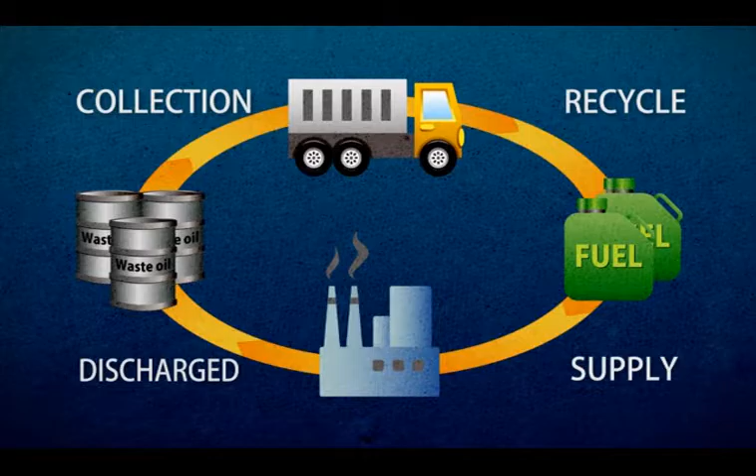Under these circumstances, Tadaki Tanaka, an Osaka Bay fisherman, established Kinki Environmental Industry Company Limited, the predecessor of REMATEC, in 1974. After engaging in collecting and transporting waste, he built a system to collect waste oil discharged from factories and recycle it into fuel. He took the lead in promoting a recycling-oriented society.

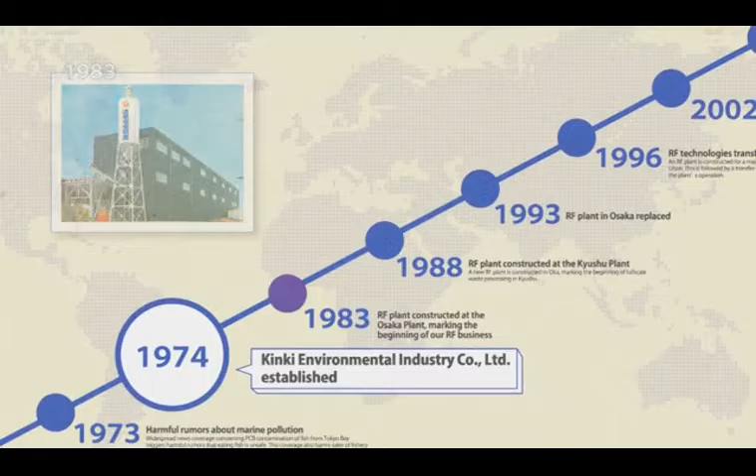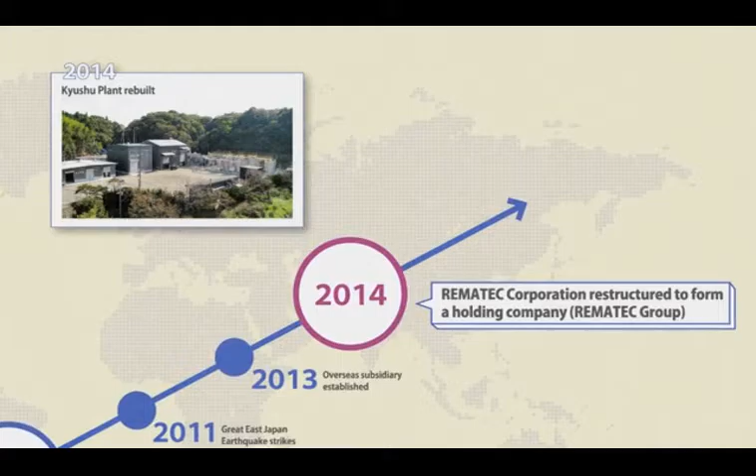Since then, while responding to the changes of the times and the characteristics of local communities, REMATEC has worked to solve numerous environmental problems with innovative ideas and steady efforts. In April 2014, 40 years after the foundation of Kinki Environmental Industry Company Limited, we shifted to a holding company system and took a new step forward as the REMATEC Group.

Our goal is to contribute to the establishment of a sustainable society by utilizing REMATEC Group's technology to recycle various materials. Based on this guiding management philosophy, with both the Japanese and global markets in mind, we use our group's power to continue contributing to protecting the global environment.

We will introduce our RF business, a resource recycling system using an industrial waste recycling plant.

As of April 2014, the remaining capacity of industrial waste final disposal sites in Japan was approximately 183 million cubic meters. Estimates by the Ministry of the Environment indicate that these sites will become full in about 14 years. Thus, the waste disposal environment continues to face difficulties.

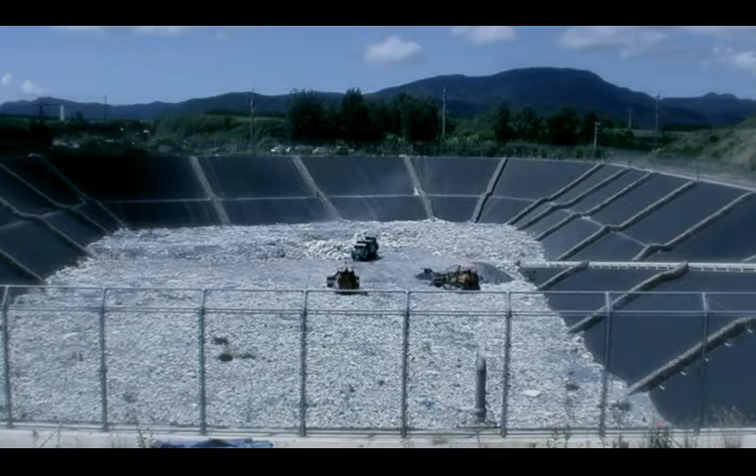Under these circumstances, in addition to reducing waste disposal costs as part of its efforts to increase profitability, industry is urged to fulfill many responsibilities as an emitter of waste. To solve this problem in industry and society as a whole, as exemplified by the 3 R's—reduce, reuse, and recycle—we need to adopt waste disposal methods that better take the needs of the environment into consideration.

One of such methods is the REMATEC Group's RF manufacturing technology. RF stands for Reclaimed Fuel, a coal fuel alternative. RF is a reversibly thixotropic auxiliary fuel composite for cement burning, using the patented mixing technology independently invented by the REMATEC Group. We call it reclaimed fuel—in other words, recycled fuel using industrial waste.

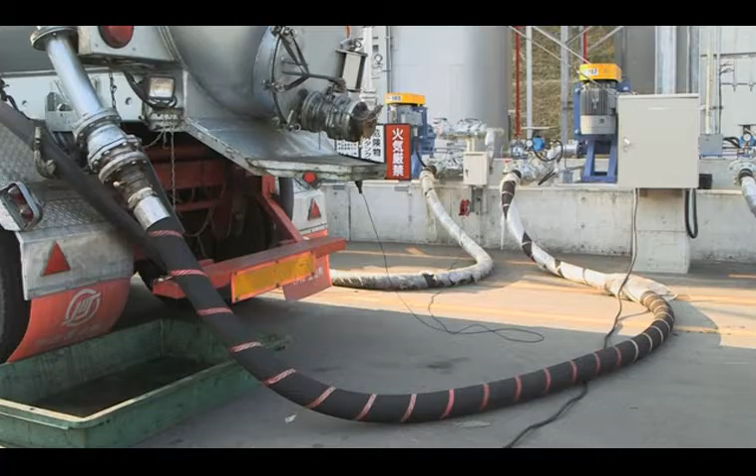The most important characteristic of RF is thixotropy. Thixotropy refers to a phenomenon whereby material viscosity falls when churned, or rises when left standing. For example, products such as mayonnaise and ketchup have such properties. Due to this property, RF excels in storage stability and can be safely transported, as its viscosity falls when pumped.

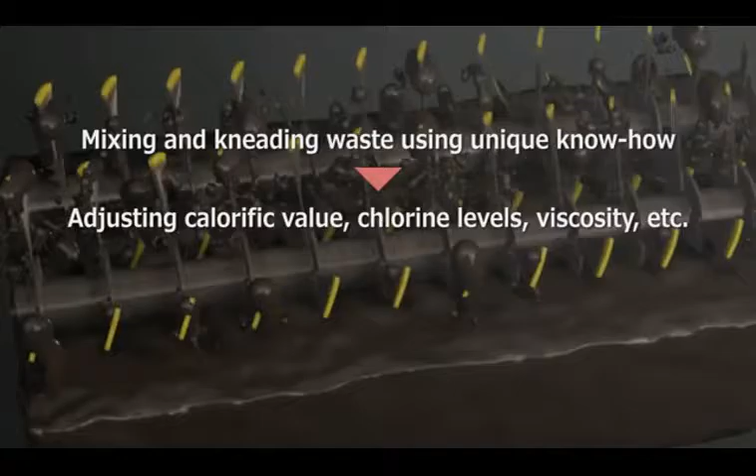Industrial waste recycling plants utilizing RF manufacturing technology can recycle a wide range of industrial waste, from liquids such as waste oil, waste acids, and waste alkali, to sludge and powdered materials such as cinder, discharged by various industries such as oil refiners, chemical manufacturers, ironworks, and paper mills. Using unique know-how, plants mix and knead various types of waste, adjusting calorific value, chlorine levels, viscosity, and so forth, then recycle the waste into auxiliary burning fuel for cement factories.

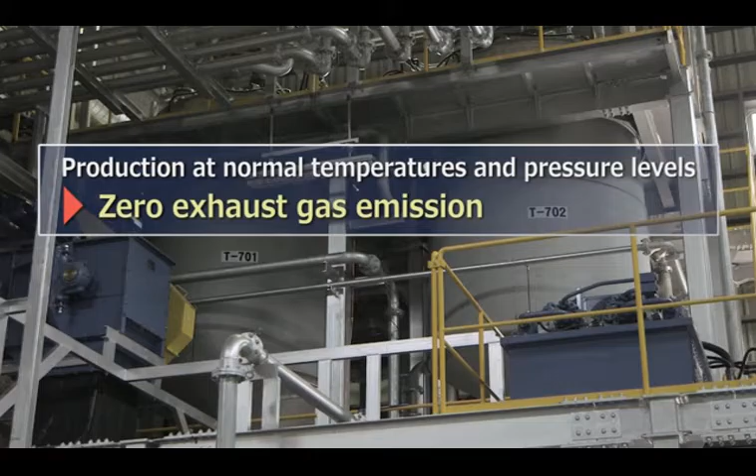In addition, the RF manufacturing process does not generate exhaust gas, as it is performed at normal temperature and pressure levels. The waste received is mixed using REMATEC's proprietary mixing technology, with nearly all of it recycled into RF. Thus, this manufacturing process generates no wastewater, a major cause of environmental pollution.

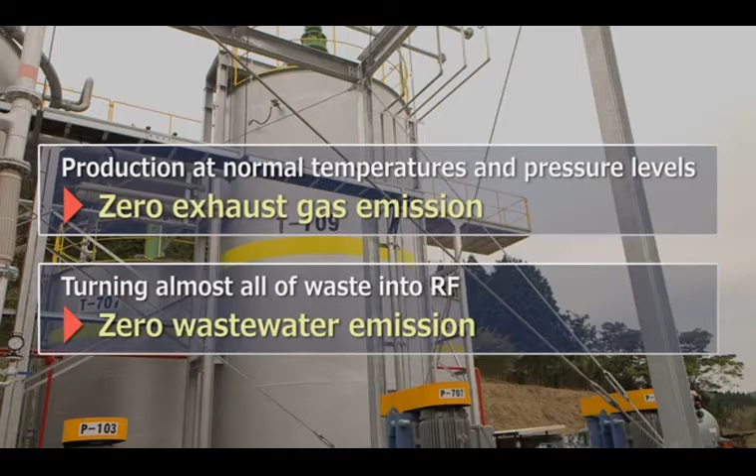Approximately 98% of waste put into the process is converted into RF, and all cinder generated at cement factories after combustion is used as raw material for cement, so no final disposal is needed. In short, RF production is an environmentally friendly recycling system with zero exhaust gas, zero wastewater, and zero landfill.

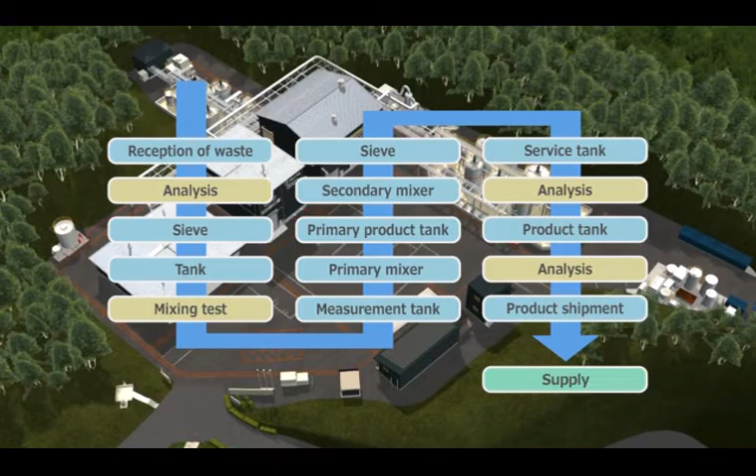The RF manufacturing process from reception to mixing to shipment is as shown here. It is important to grasp the properties and conditions of each type of waste. The know-how for matching various types of waste is also important. Now we will explain the RF manufacturing process in detail.

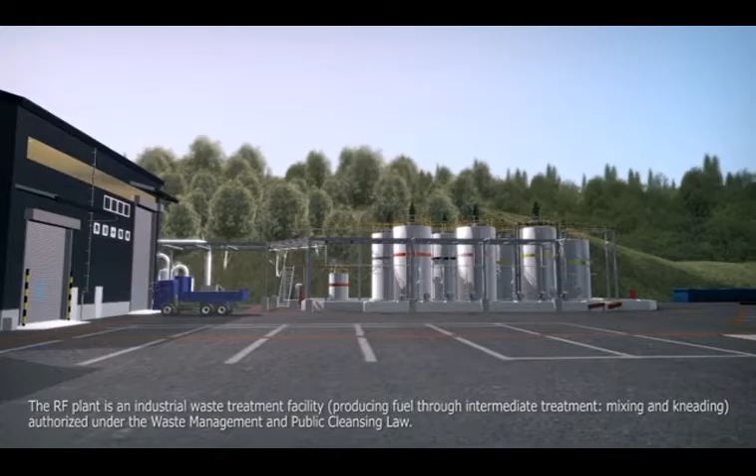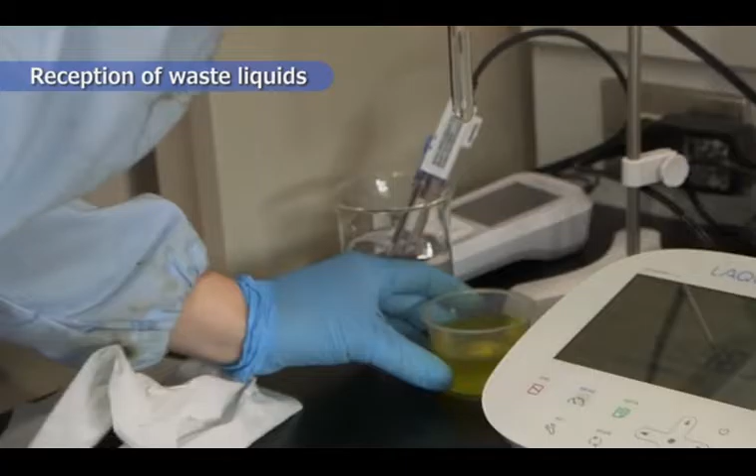The RF manufacturing plant receives waste using the optimal method for each type of waste. When received, all waste liquids are sampled to analyze their properties and conditions. After safety is confirmed through comparison with contracts and mixing tests, waste is put into different tanks for storage, depending on the contents and the type of waste.

Waste drums are also similarly sorted and stored after 100% inspections and mixing tests, and put into dissolvers for storage using drum tumblers.

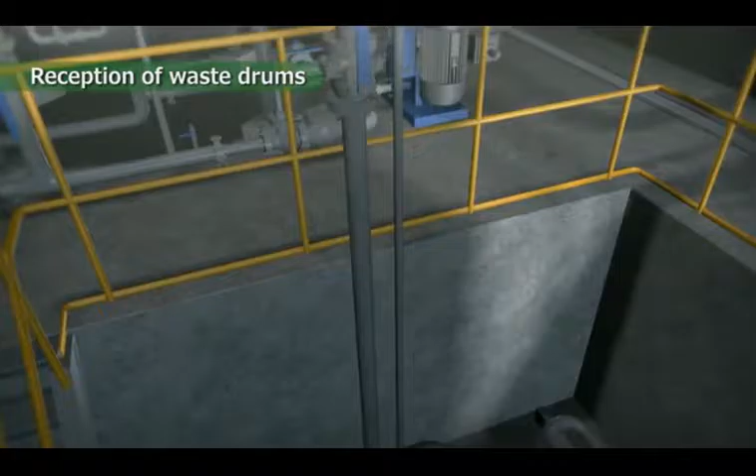Equipment dedicated to neutralization of strongly acidic or alkaline waste liquids are also installed. These liquids are neutralized in advance to reduce mixture risks.

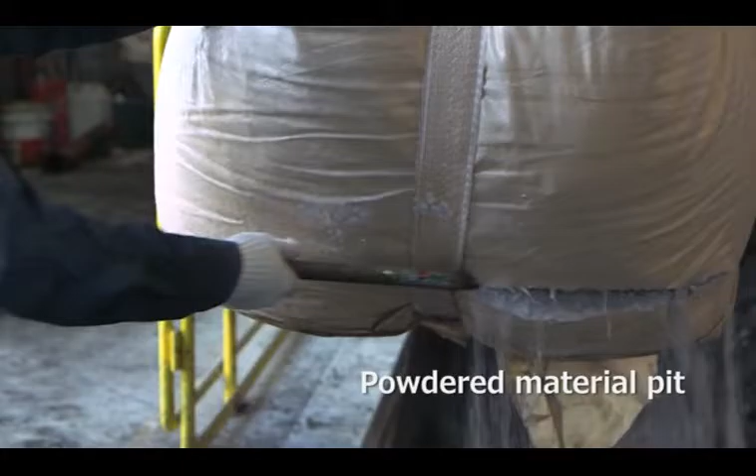Waste sludge is put into the sludge tank and powdered waste material into the powdered material pit. Both are analyzed and stored according to the type of waste.

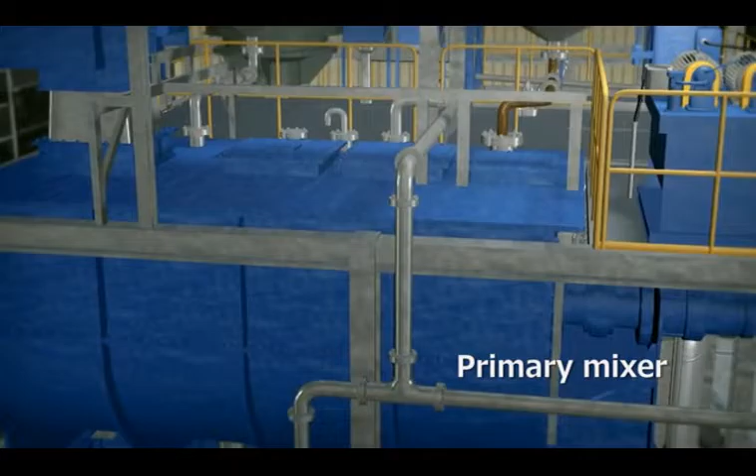Various types of waste are mixed according to the rate of combination determined in the control room. Waste liquids are sent to the primary mixer after weight is automatically measured in the measurement tank. Powdered waste material is put into the primary mixer using the crane and flight conveyor and mixed with waste liquids for churning.

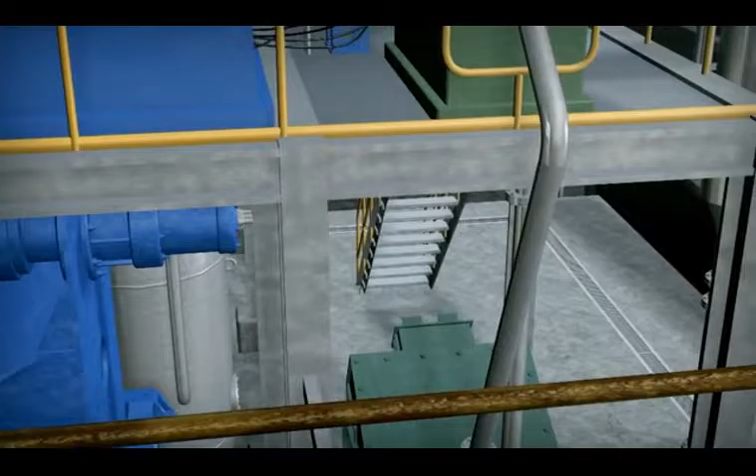Then the secondary mixer churns the mixed liquids at high speed and powdered material to crush solid matter. Through these processes, the waste becomes thixotropic and is converted into RF, recycled fuel.

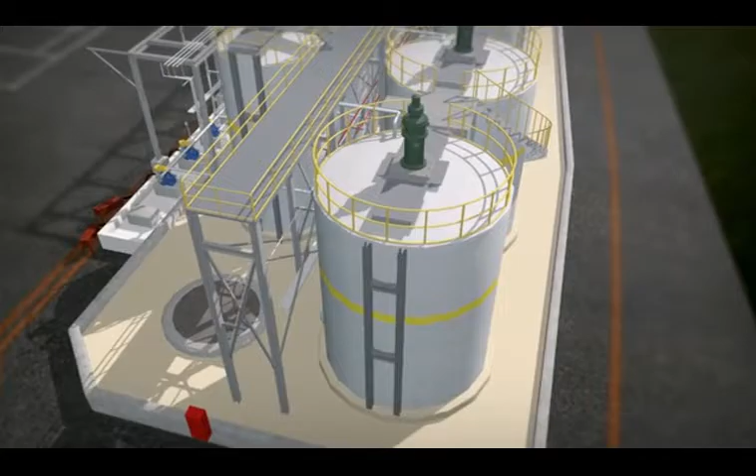Characteristically, RF is made easy to transport, store, and use through thixotropy. Specifically, while its viscosity rises when it is stored in the tank, preventing oil and water from separating, the viscosity falls when it is transported via pipe or during spray combustion, becoming liquefied.

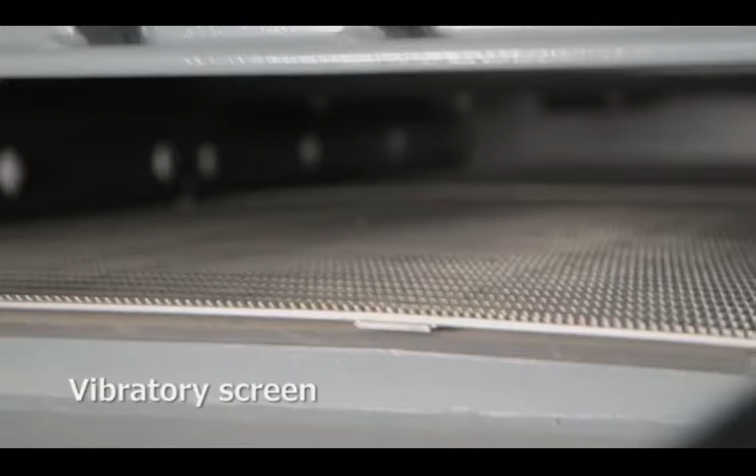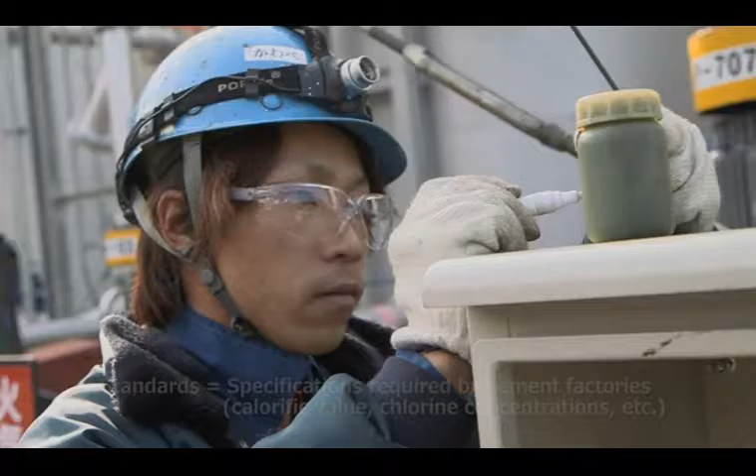Foreign substances are separated from the completed RF using a vibratory screen to enhance quality. In the last shipment process, products are analyzed for each shipment lot and only RF that meet company standards are shipped.

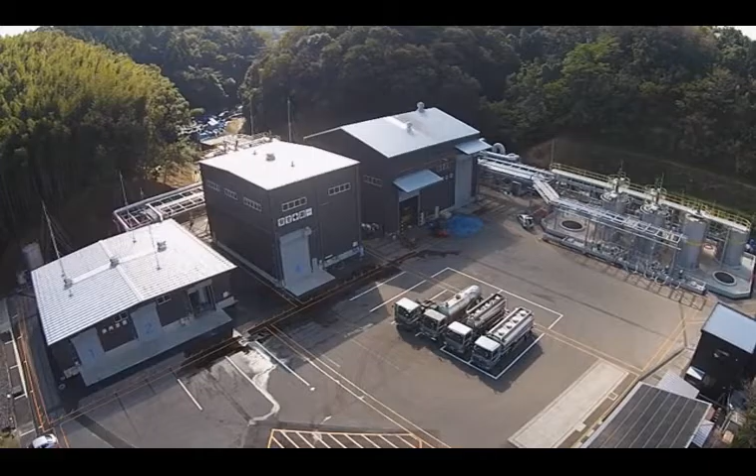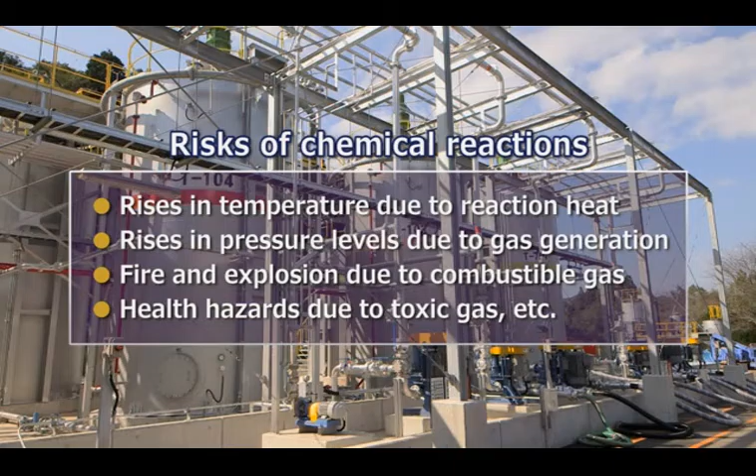To ensure safer operation, the RF manufacturing plant devises measures to reduce waste mixture risks causing adverse chemical reactions. The plant classifies the causes of chemical reactions and accidents attributed to them into 5 categories: those related to equipment, those related to material, those related to human skills, experience, and knowledge, those related to information such as documents and manuals, and those related to organizations such as management and administration. Then it analyzes the classified causes and devises the safety measures it should take.

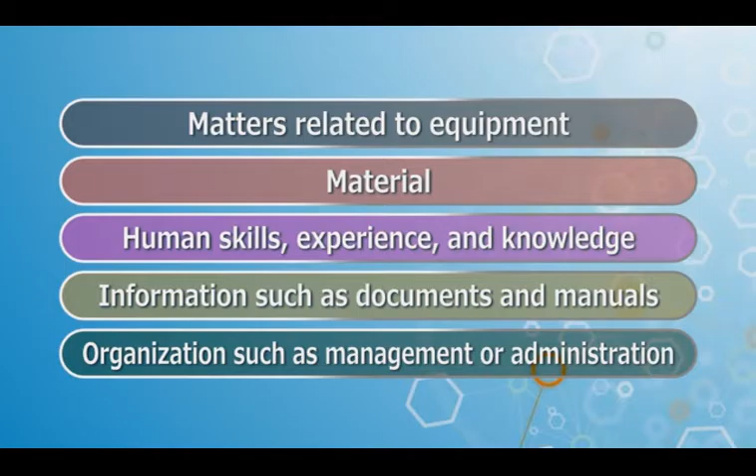Basically, when this plant was built, it was designed as a chemical plant meeting the guidelines for chemical plant safety assessments issued by the former Ministry of Labor.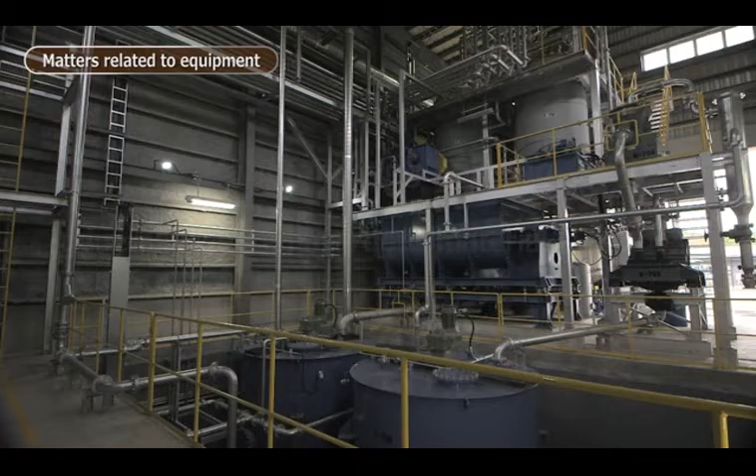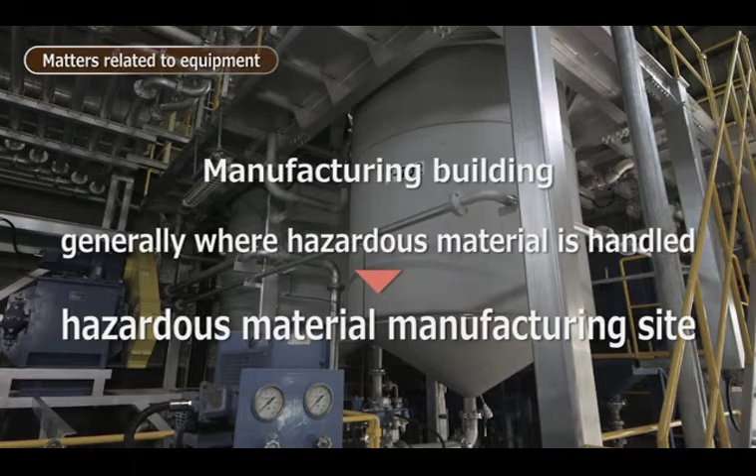RF does not fall into the category of hazardous materials as defined in the Fire Service Act, but in order to ensure its strict control, the plant has been authorized as a manufacturing site of hazardous materials. The factory is divided into 3 buildings with tank yards installed at 2 different outdoor locations.

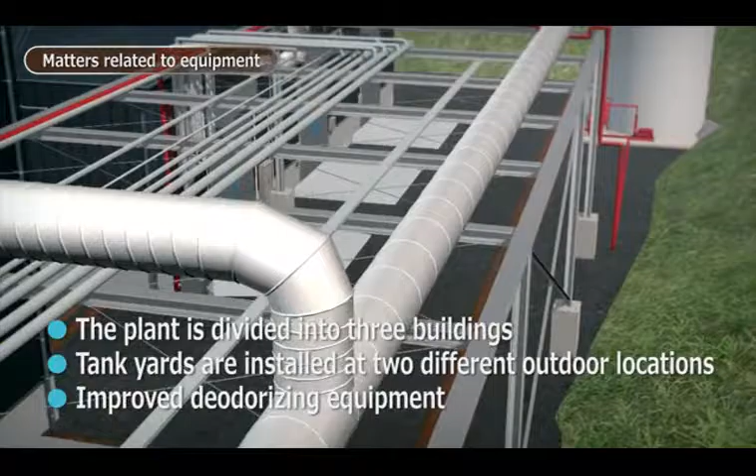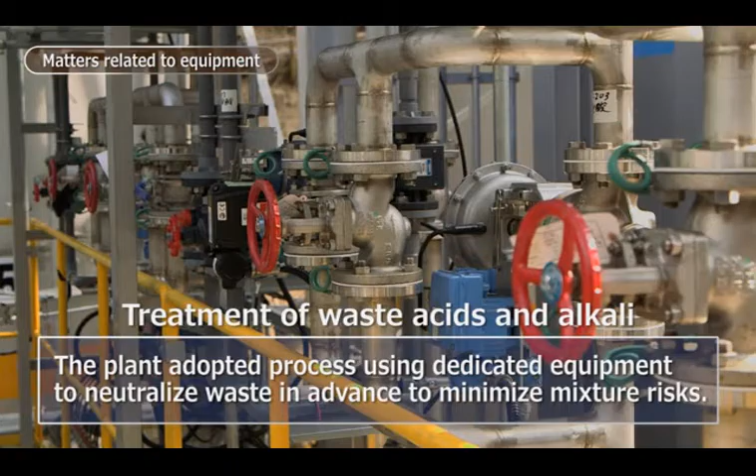In addition, as part of the deodorization measures, exhaust gas from the vent of the tanks is collected using deodorizing equipment. Waste acids and waste alkali are treated by neutralizing them in advance using dedicated equipment. Thus, pH levels are constantly controlled to minimize mixture risks.

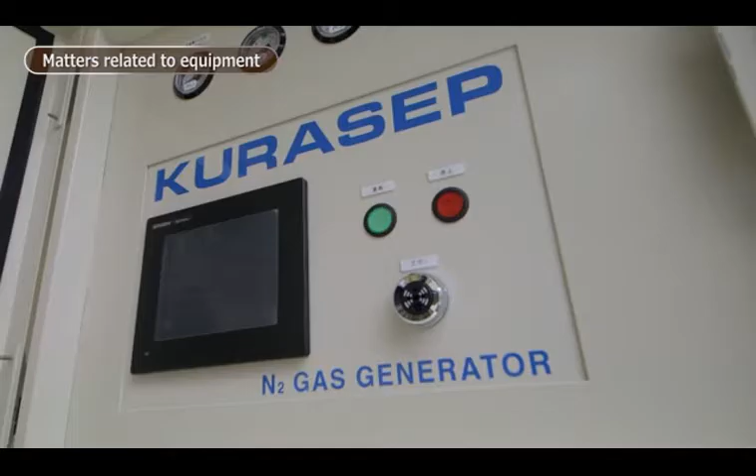Nitrogen generators are installed on the assumption that combustible gas remains in the waste oil and other storage tanks. The tanks are filled or emptied using breather valves, and empty space in tanks is always filled with nitrogen to prevent combustion or explosion.

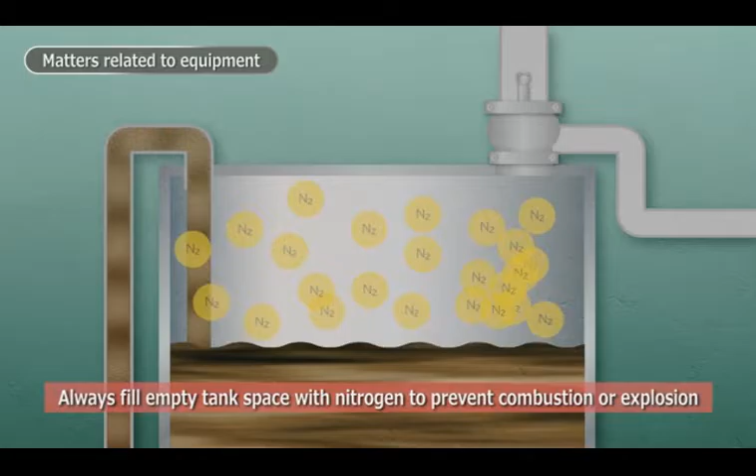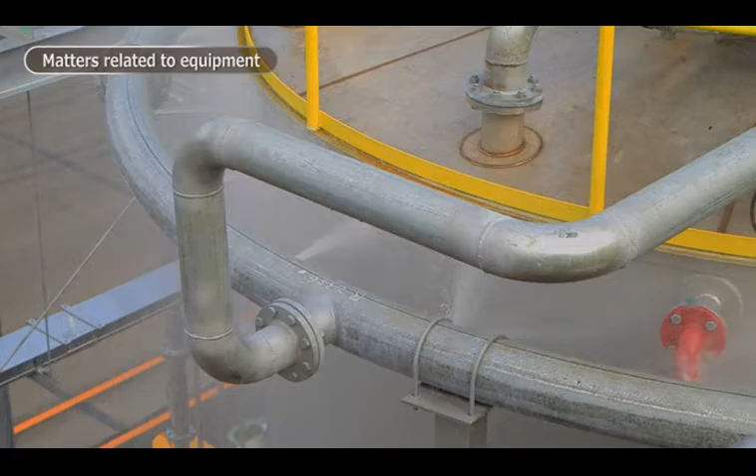In addition, the plant has equipment that sprays cold water if storage tank temperature rises rapidly due to factors such as heat from chemical reactions. In addition to spraying cold water on tanks, this equipment injects cold water directly into tanks as circumstances require.

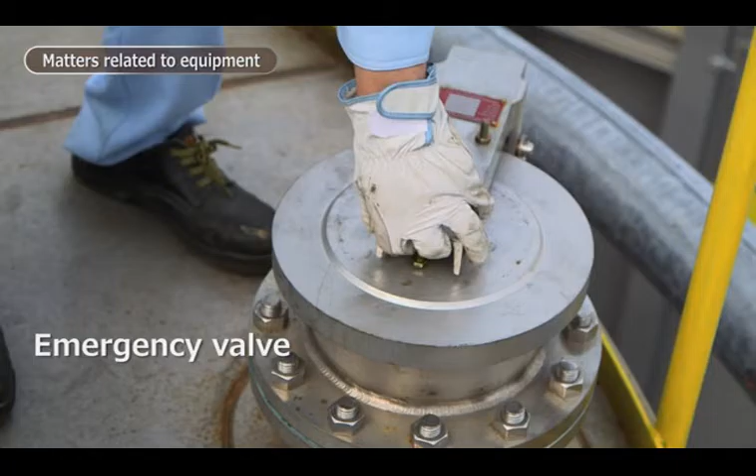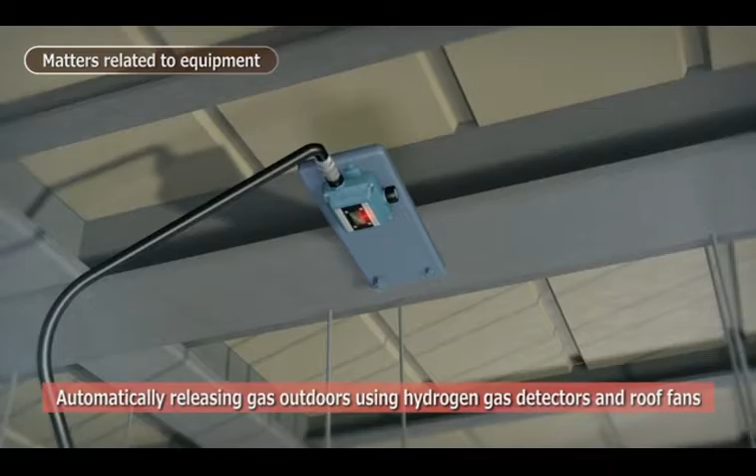Furthermore, there is a device that releases storage tank pressure. If the pressure level rises sharply, it automatically opens valves. And the plant is structured so that if chemical reactions produce hydrogen, gas detectors and roof fans installed on the ceiling of the building automatically release the gas outdoors.

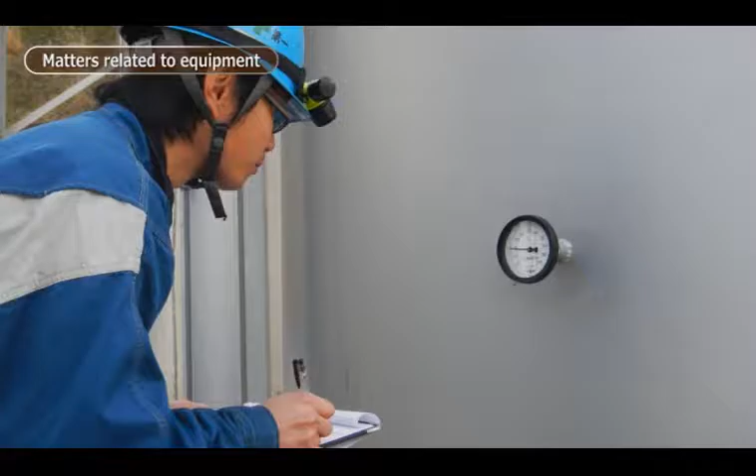In addition, a system has been put into place to automatically measure the temperature in each tank, detect changes taking place, and swiftly respond to those changes. The plant also makes hydrogen concentrations visible by establishing maximum permissible in-plant hydrogen concentration control levels and monitoring hydrogen concentration levels. If hydrogen concentration exceeds the control level, alarms for swift action sound in plant buildings.

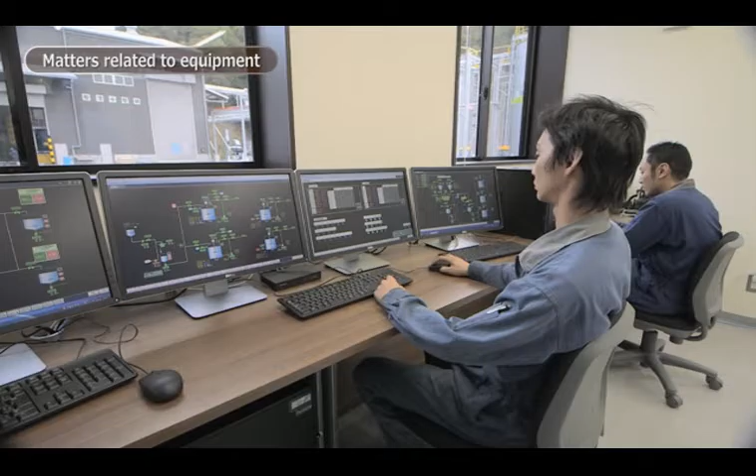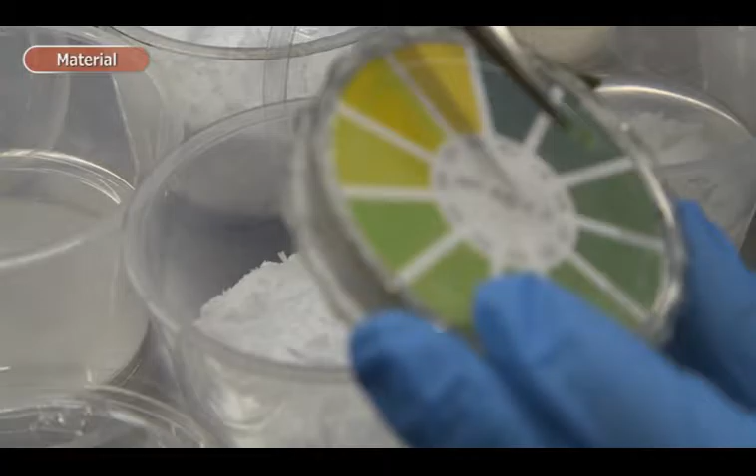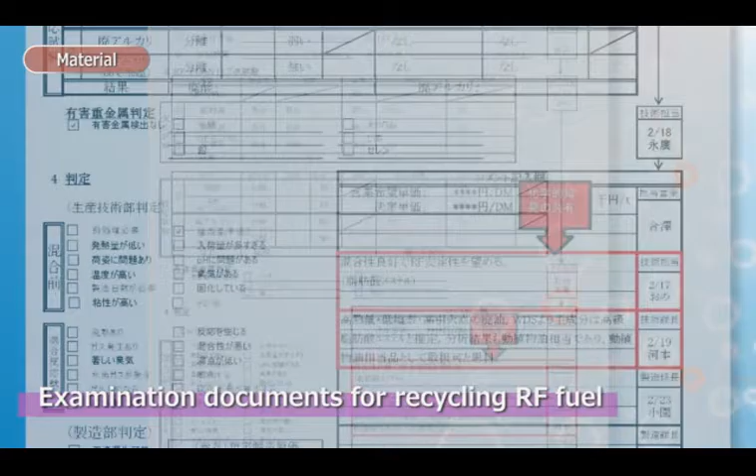As part of the measures to properly grasp the properties and conditions of waste, we have strengthened the inspection system for waste brought into the plant. To confirm the chemical properties of waste, we take samples and analyze them to determine whether they contain heavy metals or such. We make an all-out effort to confirm the safety of waste in advance by including risk details based on chemical knowledge in the sample examination documents.

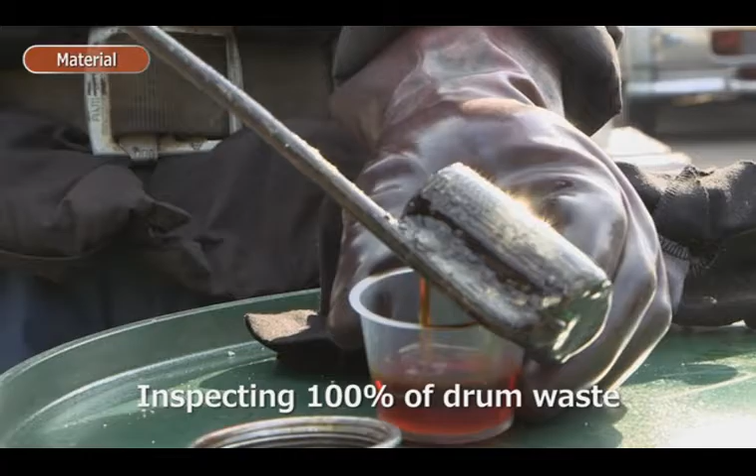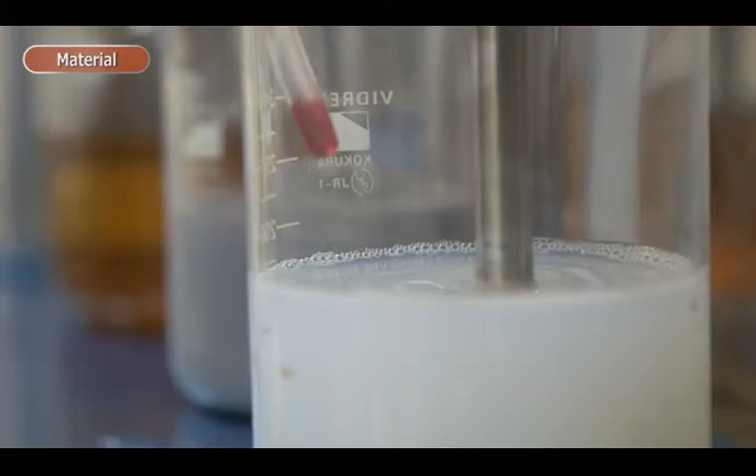We conduct 100% inspection of all waste materials contained in drums. When received, all waste is compared to the properties and conditions described in the contracts to confirm any differences. In the case of mixed waste, we conduct mixture tests using beakers to confirm the mixture composition or any chemical reactions.

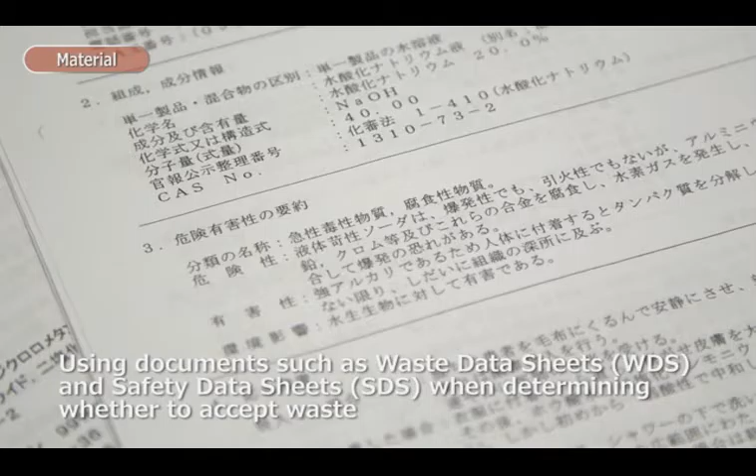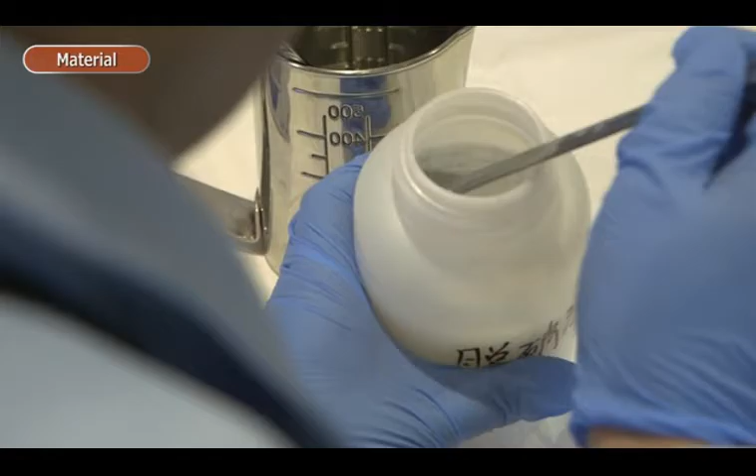We ask dischargers to provide detailed information on the waste they discharge using documents such as waste data sheets and safety data sheets. We use these sheets to determine in advance whether we should accept waste from dischargers. We also ask dischargers to provide information on changes in the waste generation process or the chemicals used, etc., periodically confirming that there are no changes from the waste properties and conditions described in the contracts.

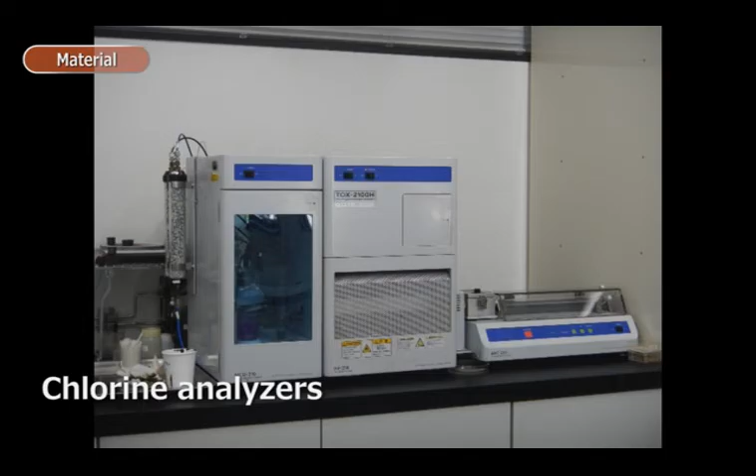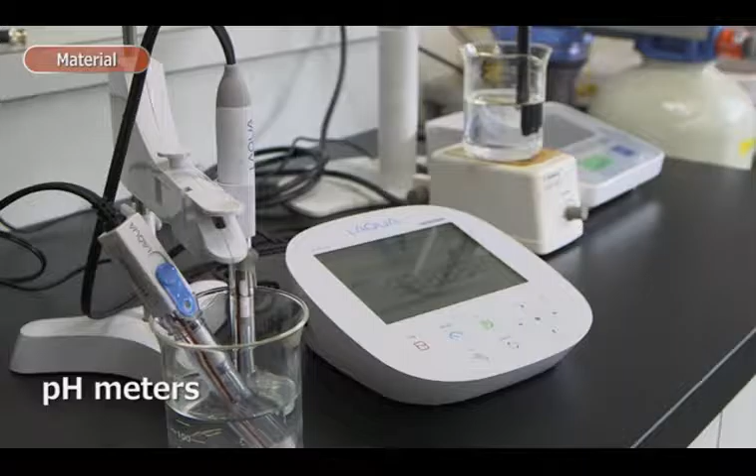Furthermore, we have created calorimeters, chlorine analyzers, fluorescence X-ray analyzers, flash testers, pH meters, and viscometers to establish a high-level analytical system.

As part of employee training, we hold meetings of all employees to examine operation flows in accordance with safety assessment guidelines. Other training programs include training aimed at improving knowledge of chemistry, tests for degree of understanding, and follow-up training based on test results. We also ask the Japan Industrial Safety and Health Association and other external organizations to send experts to training sessions mainly for managers and supervisors.

Lecture subjects include fires and explosions caused by chemical substances.

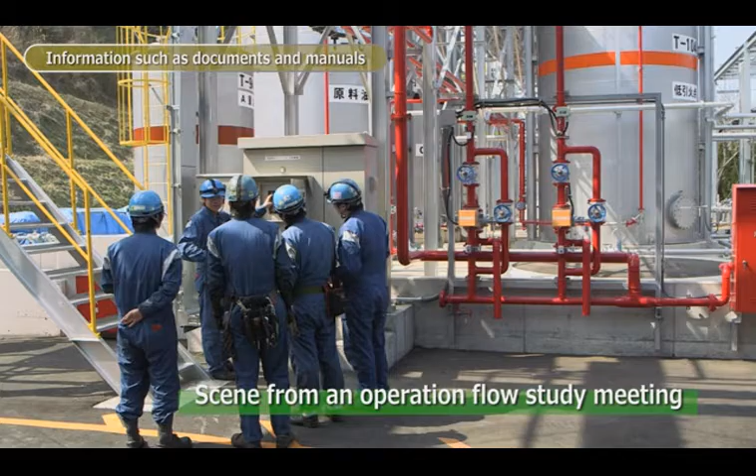One information-related initiative is establishing work standards for each factory. In addition to periodically revising work standards as required, we certify the abilities of each employee based on work standards and other guidelines in an effort to improve skill levels.

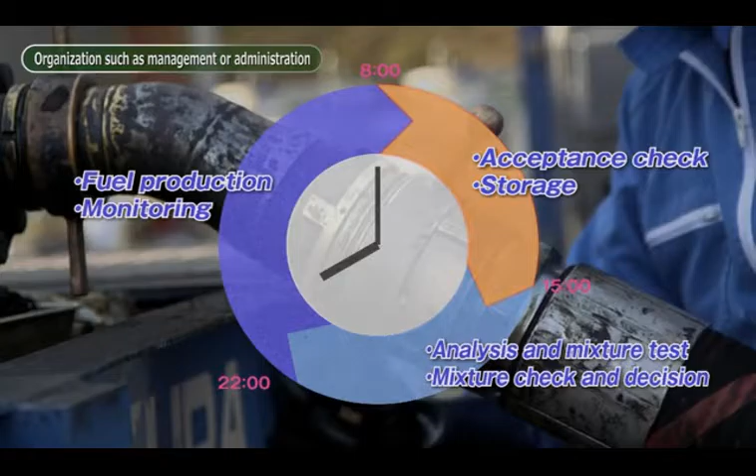To reduce waste mixture risks, the Kyushu plant operates 24 hours a day. We receive waste and produce products at different times. After the properties and conditions of received waste are made uniform in storage tanks, we take samples from each tank to determine the mixture of products to produce on the day.

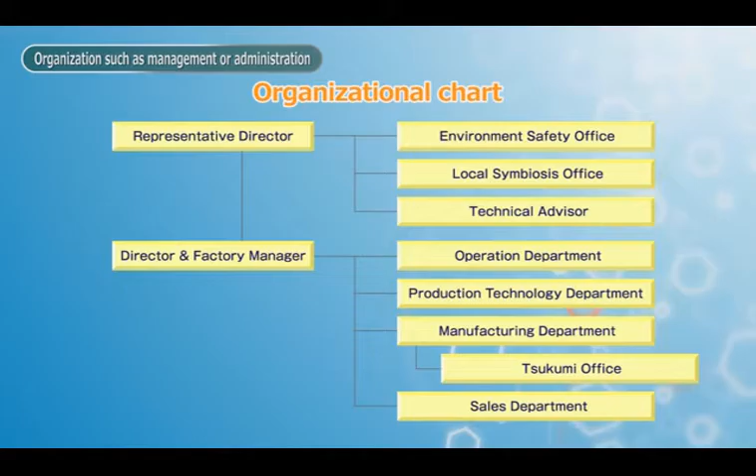We also established a production technology department staffed with personnel possessing high levels of chemical knowledge. Thus, we have strengthened the system for assessing waste mixture risks based on chemical knowledge, ensure quality control, and improved employee skills.

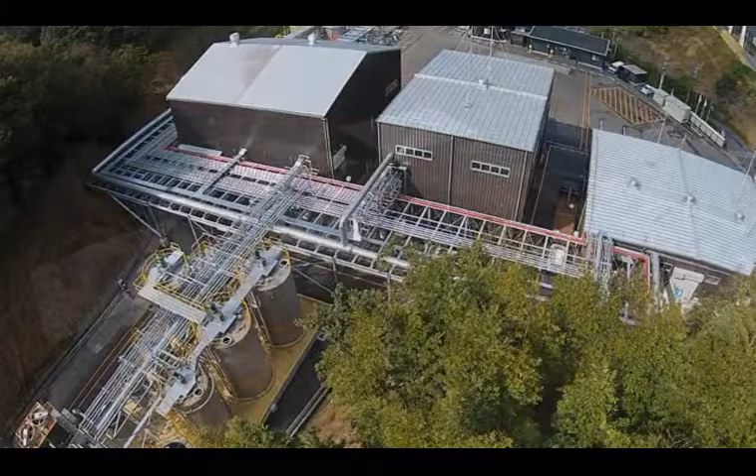By properly controlling risks, we will continue to strive to ensure safe operations of the RF business and improve the quality of the products we produce. We will also work to become Japan's safest waste recycling plant. In the future, we will establish a system for proposing new, more environmentally conscious ways of recycling.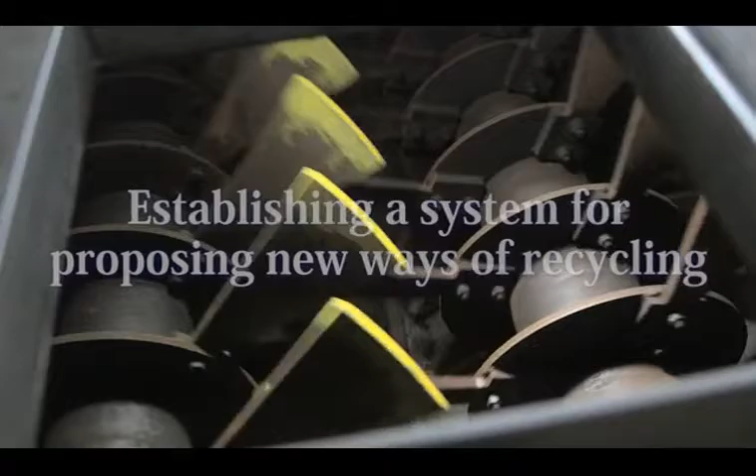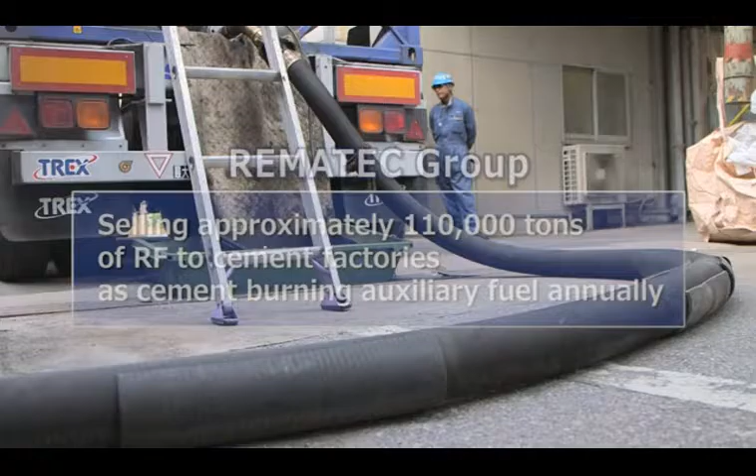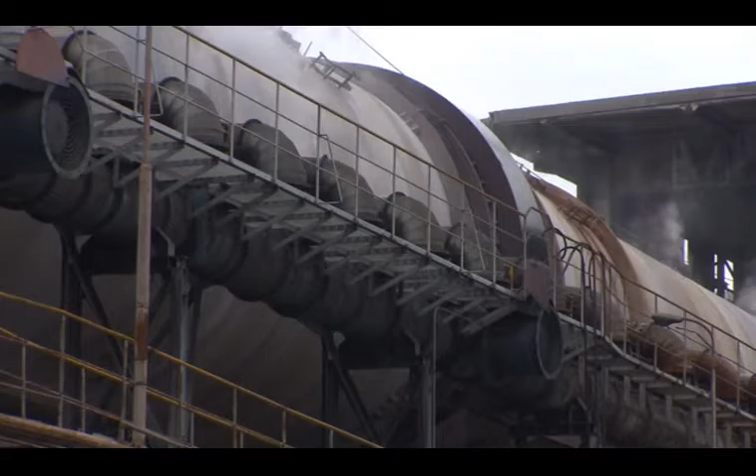REMATEC's RF manufacturing technology mixes various types of waste using proprietary know-how to convert waste into fuel alternatives to coal. At the REMATEC Group, two companies, REMATEC Corporation and REMATEC Kyushu Corporation, produce approximately 110,000 tons of RF annually and sell it to cement factories as auxiliary fuel for cement burning. By recycling waste into coal fuel replacements, we help reduce greenhouse gas emissions. This recycling system, based on RF production, enables us to produce products that suit the waste we receive.

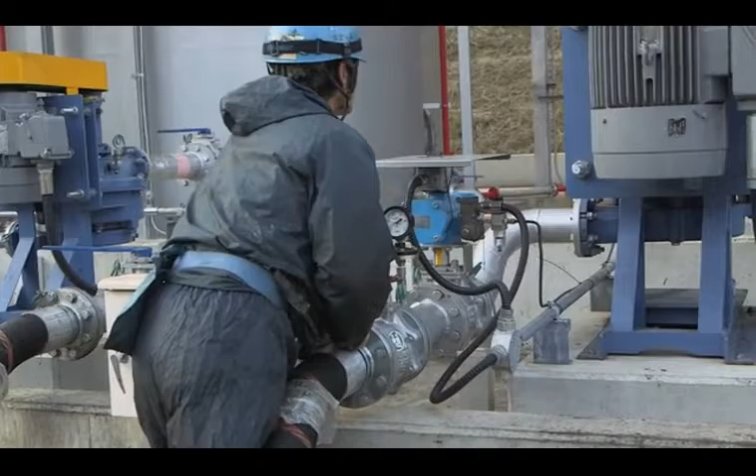Our founder hoped to restore the ocean's beauty. REMATEC's unique resource recycling technology has recycled a wide range of industrial waste to protect the natural environment and conserve limited resources. We at the REMATEC Group will contribute to creating sustainable innovations and developing local communities.